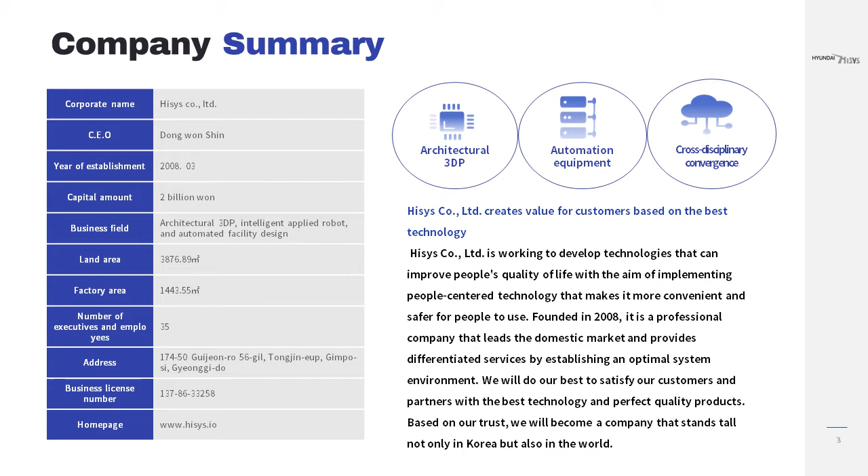Slides 3 to 6 show our company history. You may wish to read through these later; due to limited time, I will skip these slides. Our major shareholder is Hyundai BSNC, an affiliate company established by a member of the Hyundai Group.

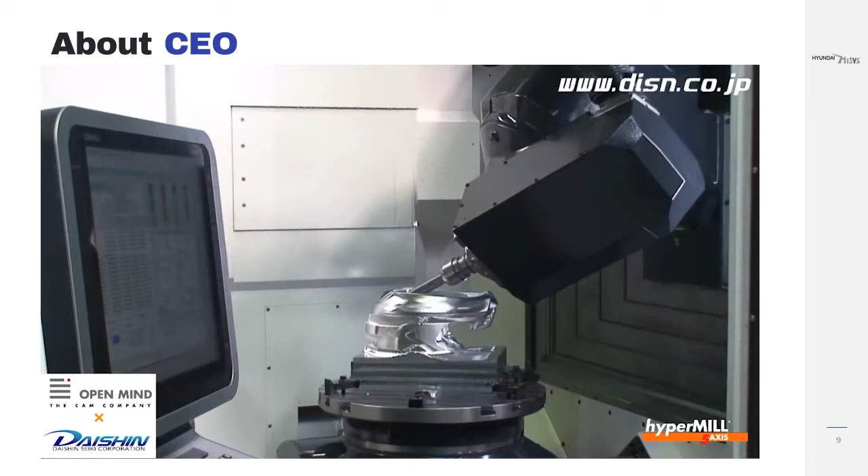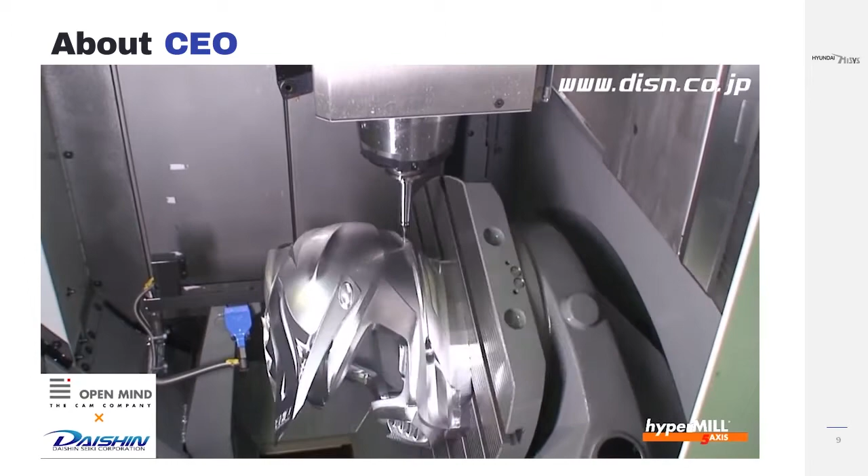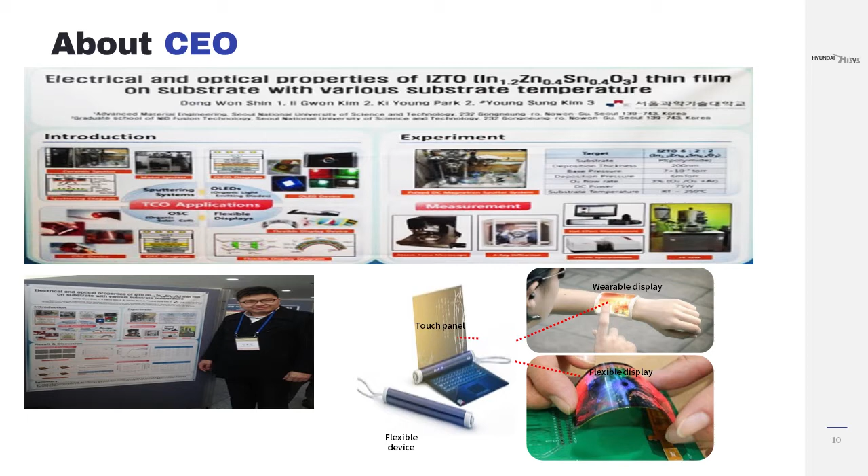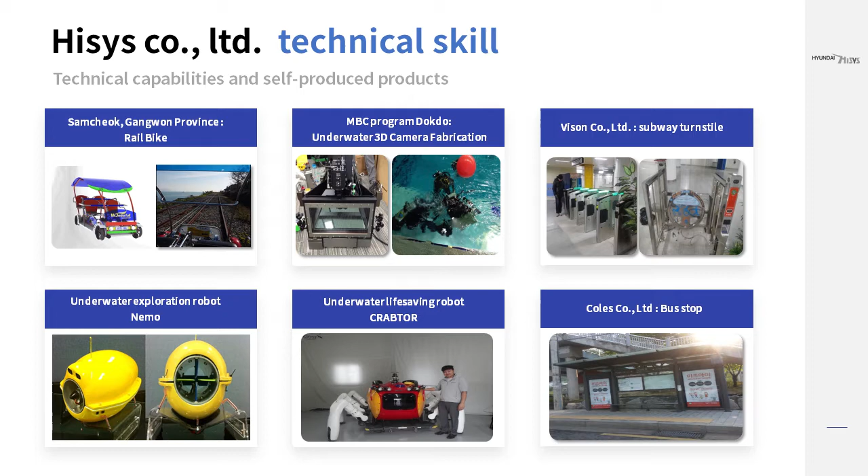As the CEO of HISYS, I have a breadth of experience and knowledge in engineering, having invented many innovative products including flexible touch panels and wearable displays for Samsung and LG. I have also developed automation production lines, electrical vehicles, prototype robots, underwater robots, subwater devices, and automated transportation systems. Additionally, I have supported artists with the development of their sculptures and animation figures.

Let me introduce you to our 5 core businesses: 3D civil engineering and construction projects, drone taxi development, hydrogen fuel development, waste plastic recycling, and aquaponics for the aquaculture industry.

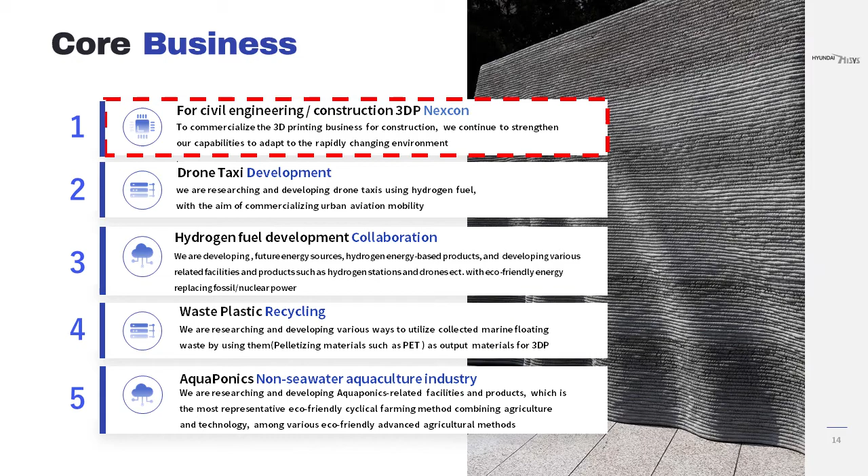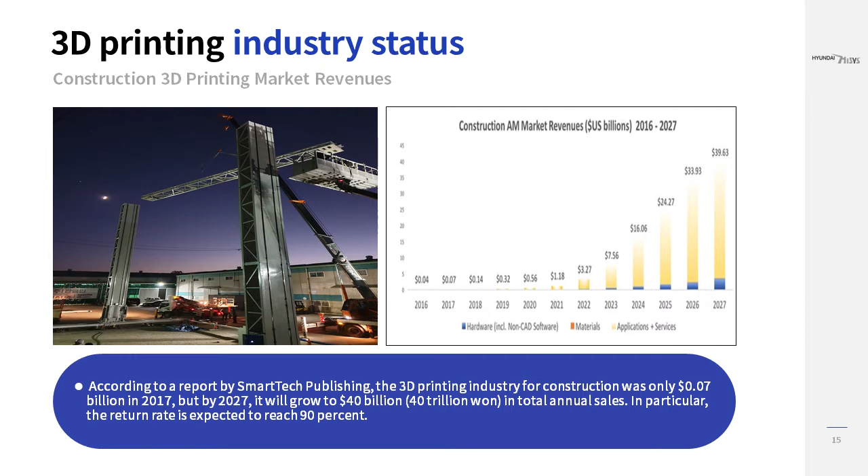According to reports by SmartTech Publishing, the 3D construction industry will grow to about $40 billion in total annual sales in the future. There are 5 advantages to using 3D printing construction technology: customized designing, reduction of material use, time efficiency, reduced labor, and waste reduction.

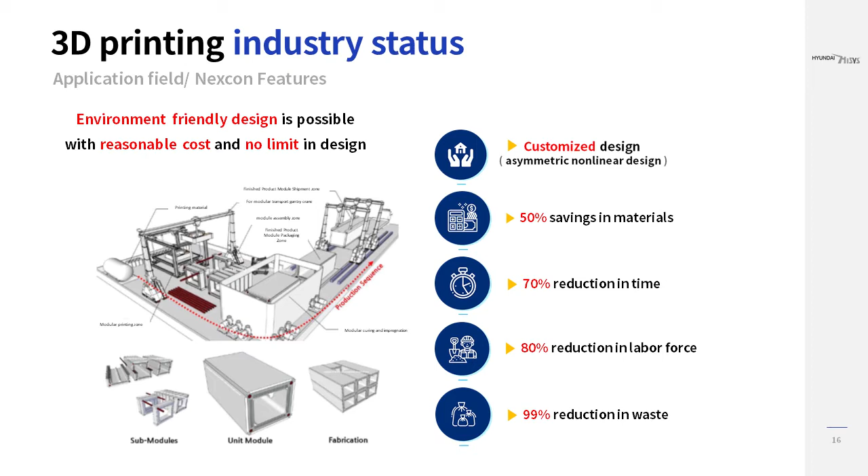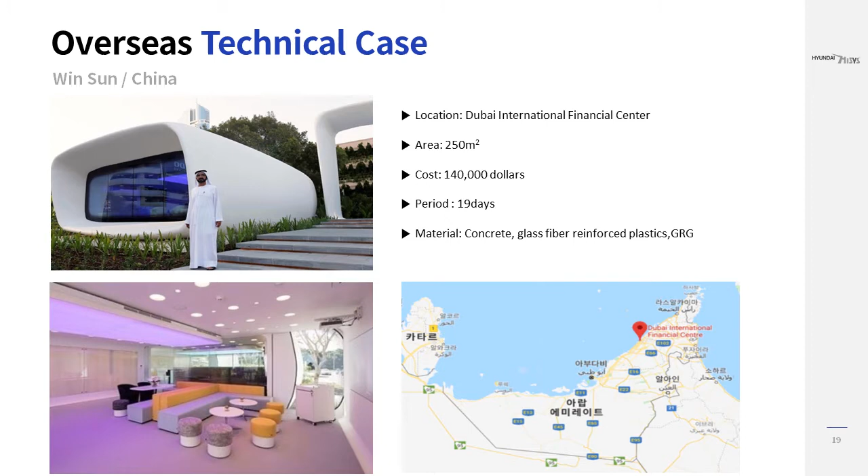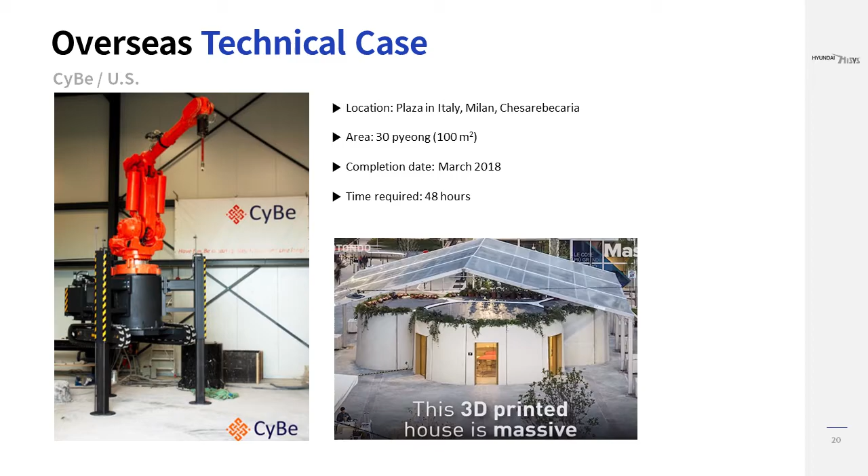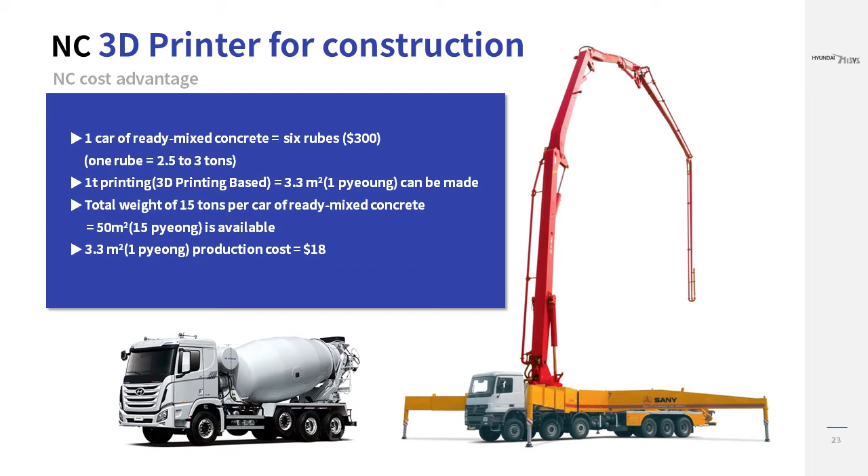To build a 3.3 square meter area using concrete, the material cost will be only $18 through 3D printing. Inevitably, the cost efficiency will be higher.

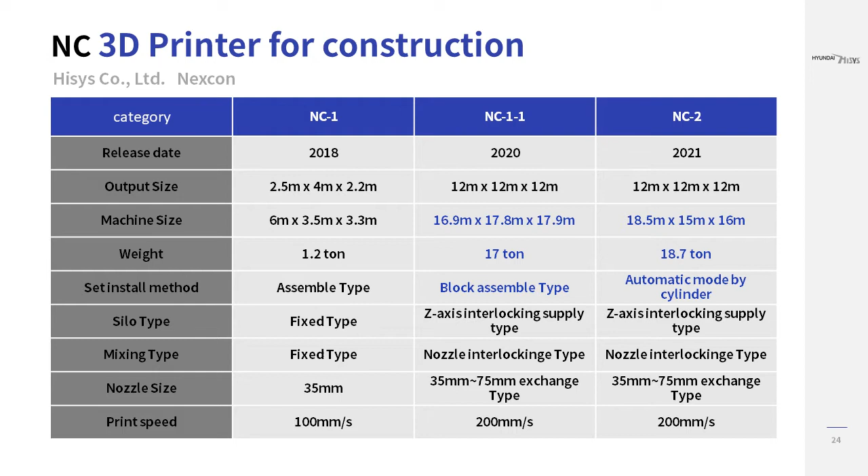This slide shows the development of our NC 3D printers. Our first prototype was built in 2018. We have currently developed version NC 1-1 and will reveal our latest model in 2021.

Our NC 3D printers are developed as gantry type models for easy movement, efficient assembly and dismantling, and enhanced accuracy. It is made to endure outdoor operations.

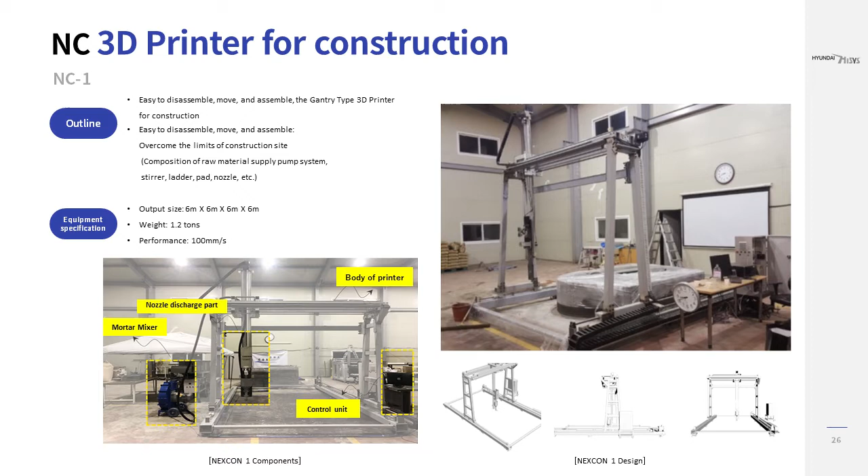NC1 was built in 2018 and is the first prototype of our 3D printers. The photo shows the main body of the gantry type model, including the nozzle, discharge unit, mortar mixer, and control unit. The gantry model allows for efficient assembly and dismantling, and enhanced accuracy. It is made to endure outdoor operations.

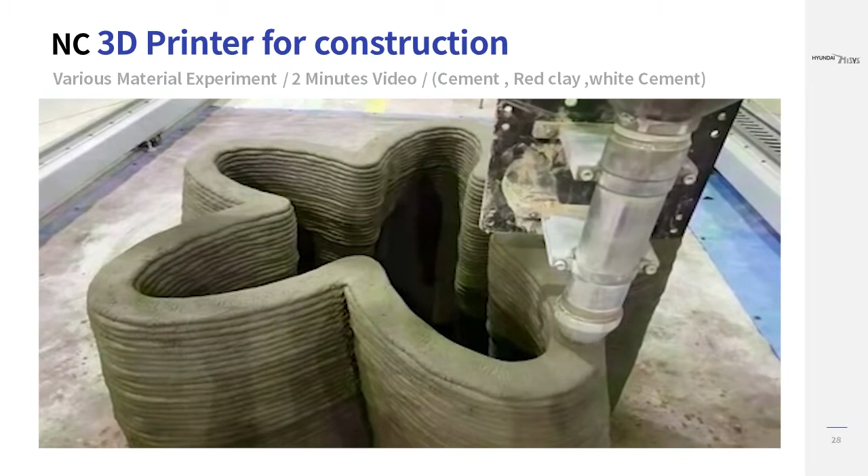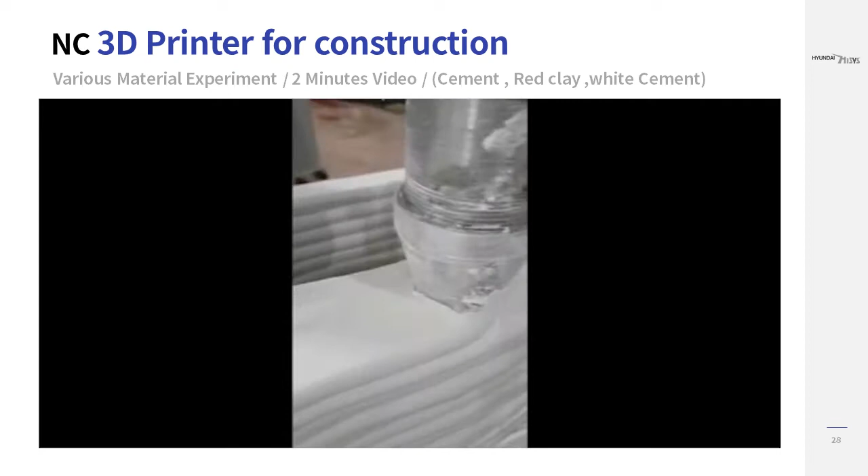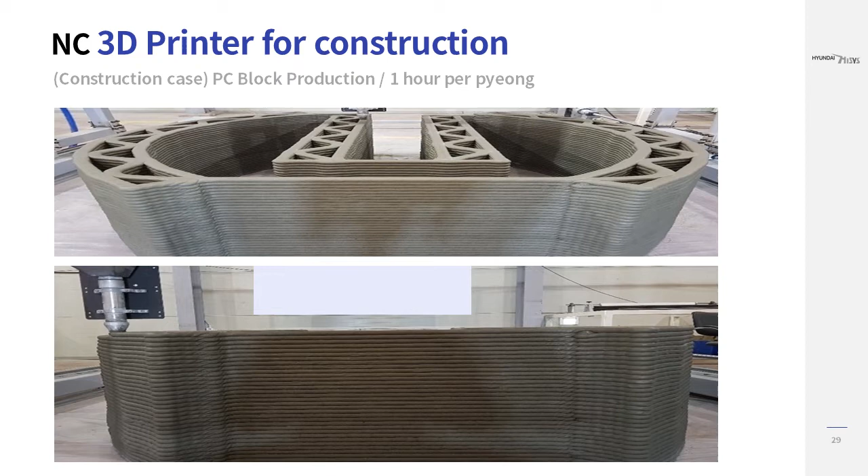The escalation of a precast block takes about 1 hour per pyeong, which is 3.3 square meters. The precast concrete is produced as blocks into which anchors are embedded for easy transportation.

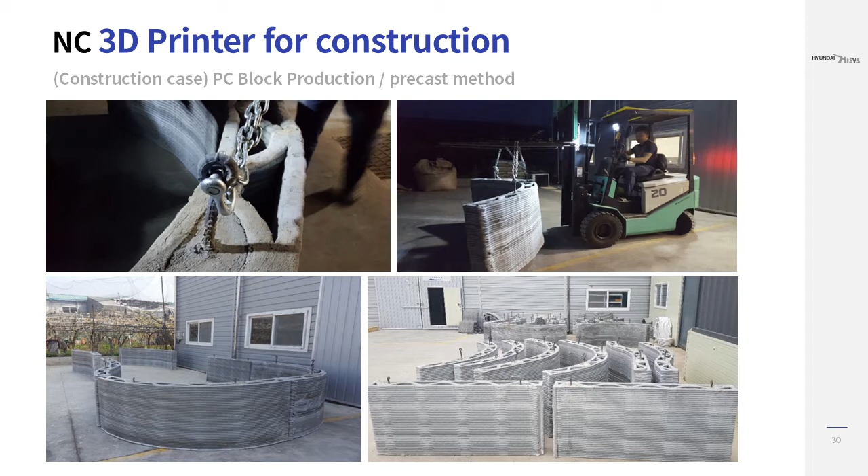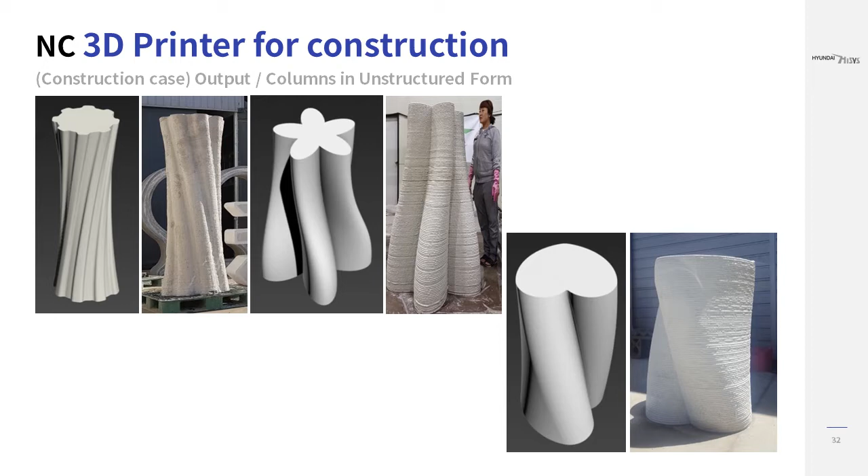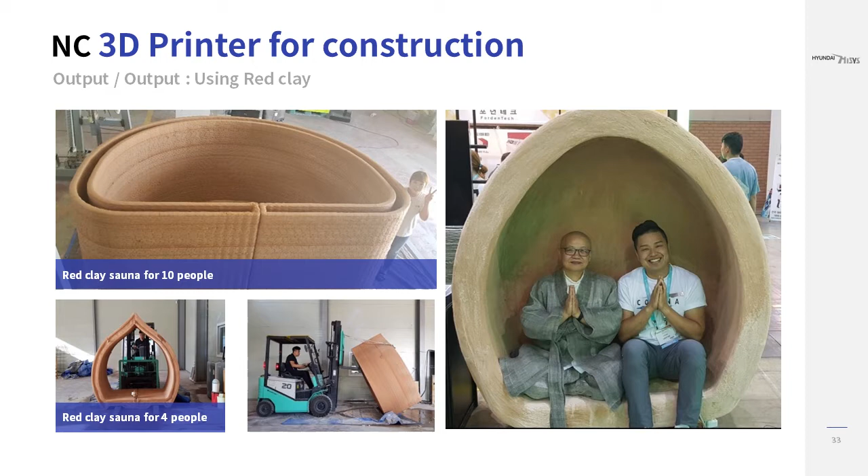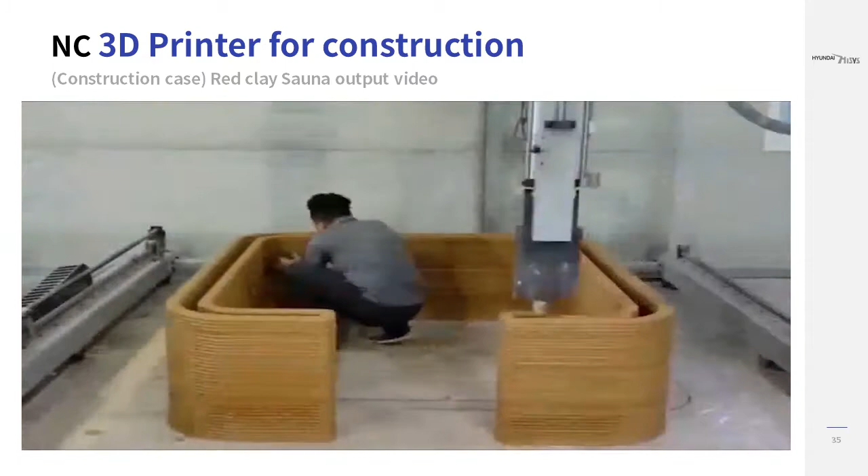3D printing construction will be instrumental in the future for humanitarian projects. The layered wall of a typical movable homeless shelter for 5 people can be escalated within 4 hours.

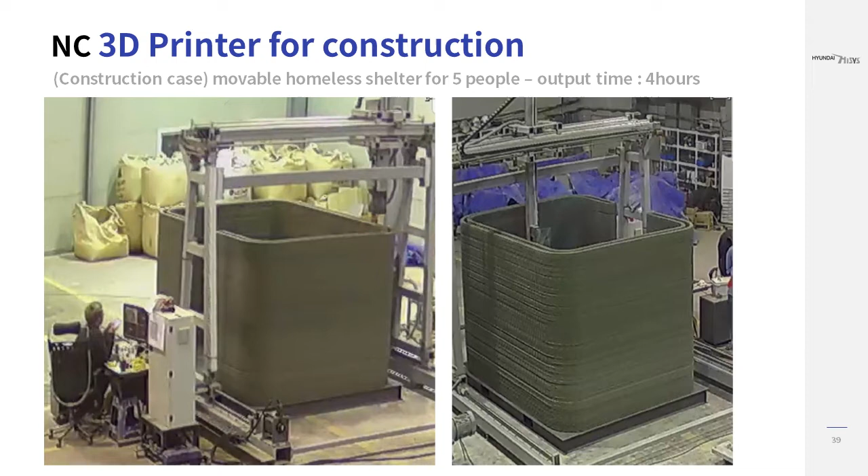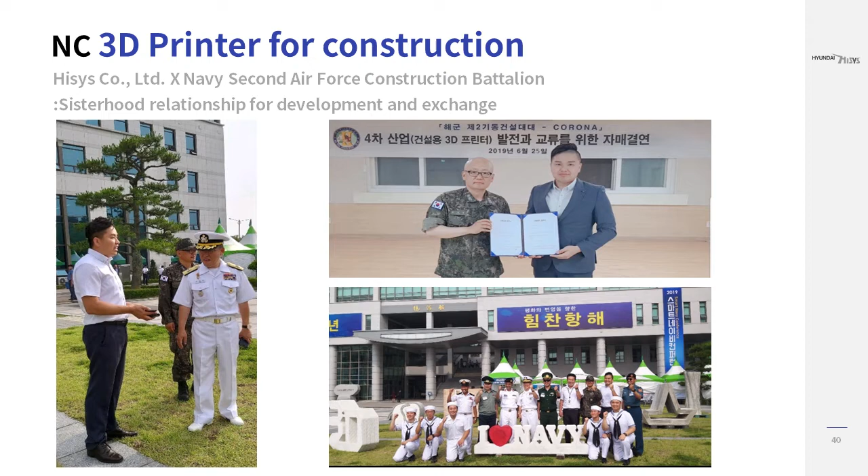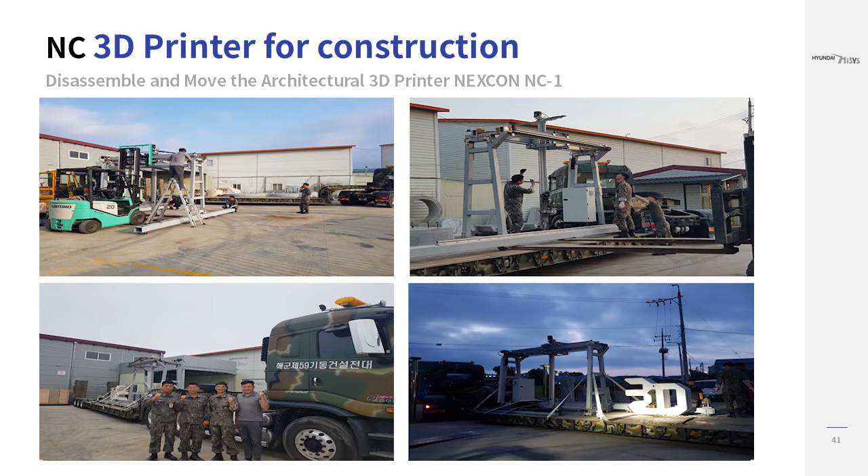HISYS has been designated as a development and exchange partner with the Korean Navy 2nd Air Force Construction Battalion for future developments. Our NC1 model has been transported onto the military site to produce various supporting facilities. As you can see, we have produced military bunkers and protection facilities in barracks.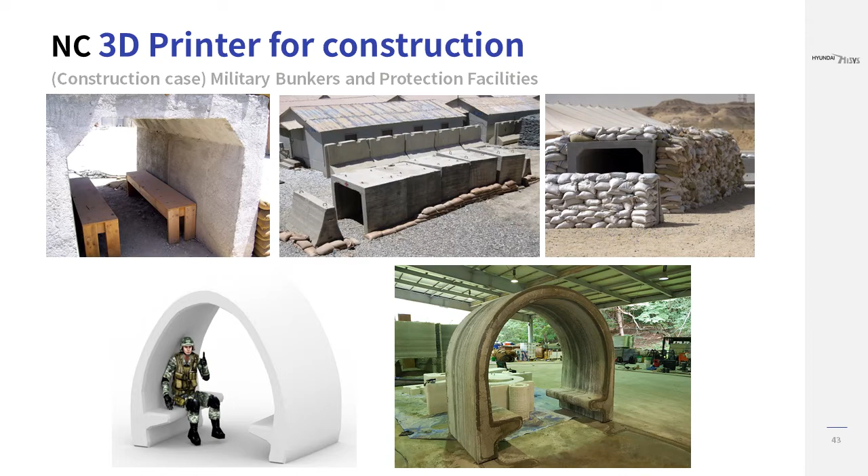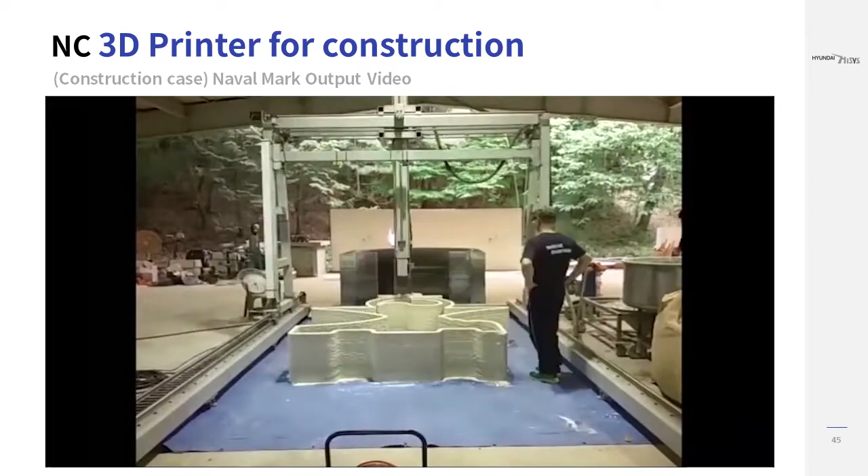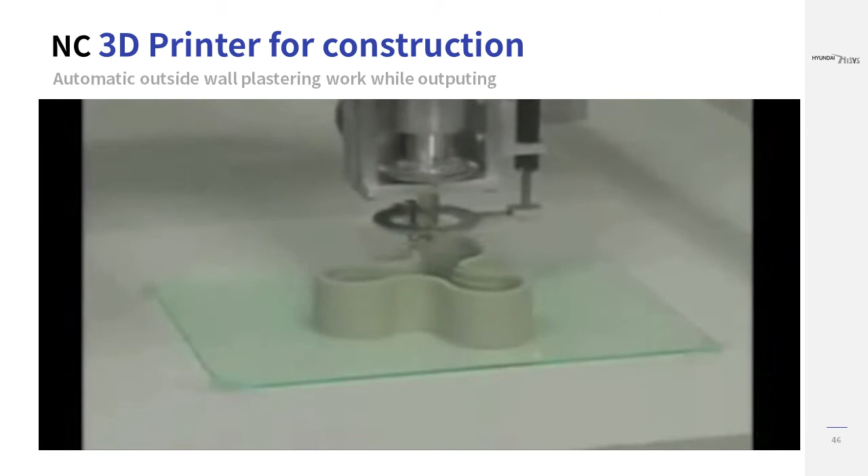Architectural work is not just limited to buildings. Keel block guard posts and barriers on battalion ships can also be produced using our NC1 models.

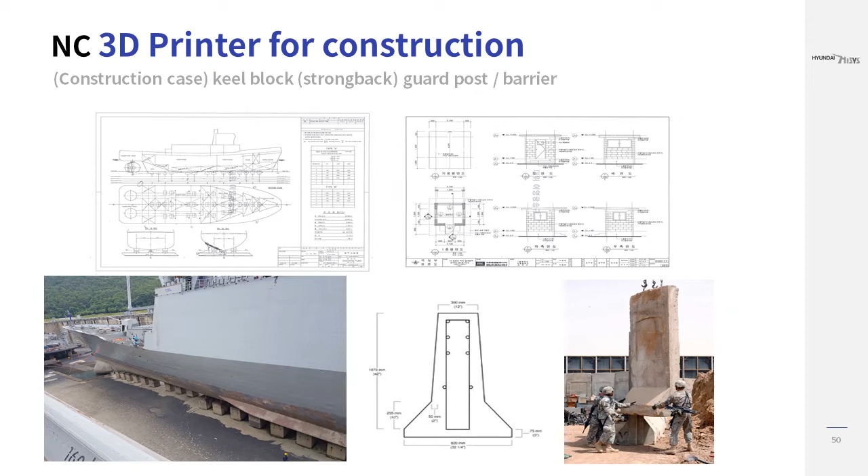To symbolize partnership with Hyundai BS&C, our first mini project was to build a security office.

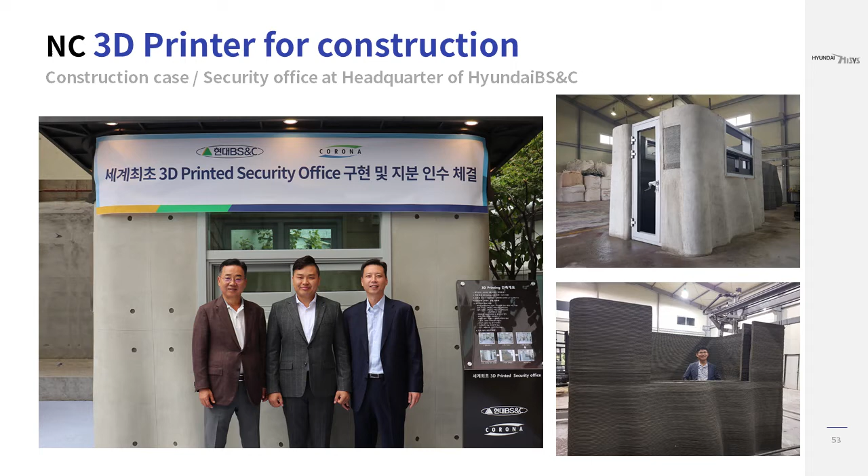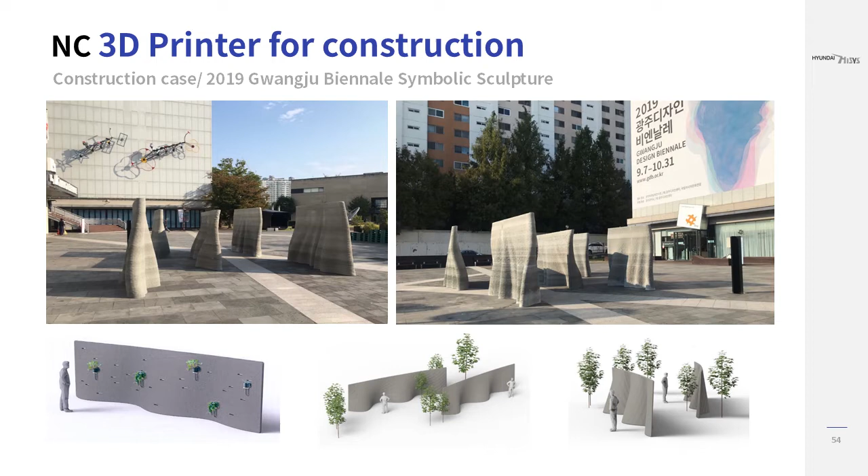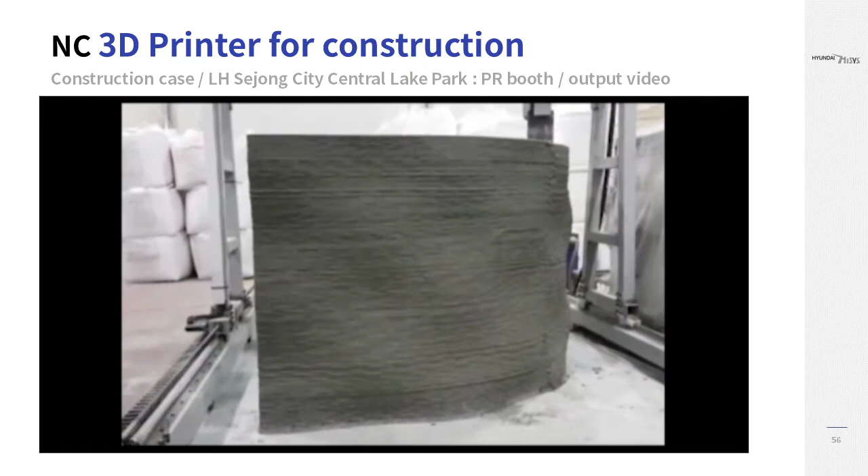The NC1-1 is our latest model, produced this year. The improved composition of the raw material supply pump system, stirrer, ladder, pad, nozzle, and other parts has meant that we now have the ability to work more flexibly on construction sites.

When assembling and dismantling the printer, despite its increase in size, inevitably the output size is also bigger by almost double.

Precast blocks can now be escalated as large as 12 meters in width by 12 meters in length by 12 meters in height.

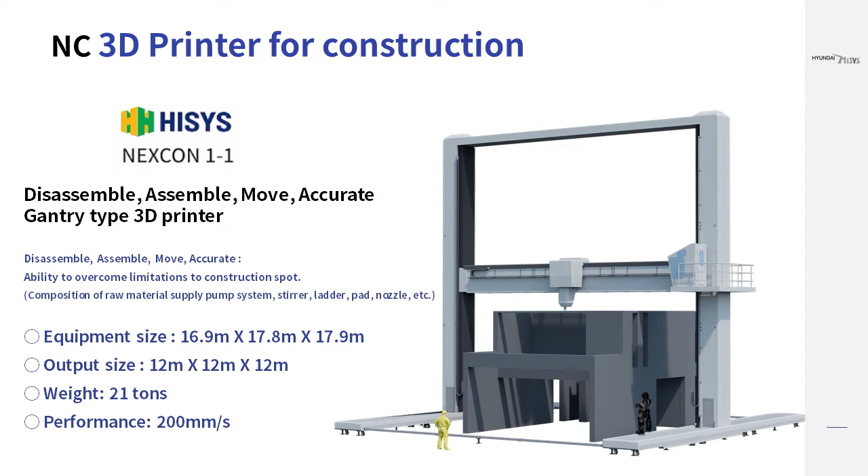Almost 10 domestic and foreign technology patents have been verified for the core technologies of our 3D construction printers. Additionally, about 20 more patent applications are currently in progress.

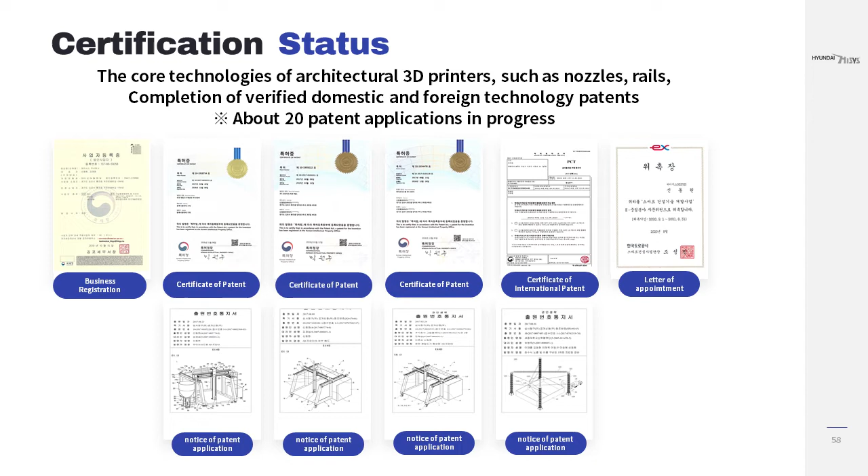Our NC1-1 is currently being reviewed for the Guinness Book of World Records as the biggest innovative 3D printer for architecture.

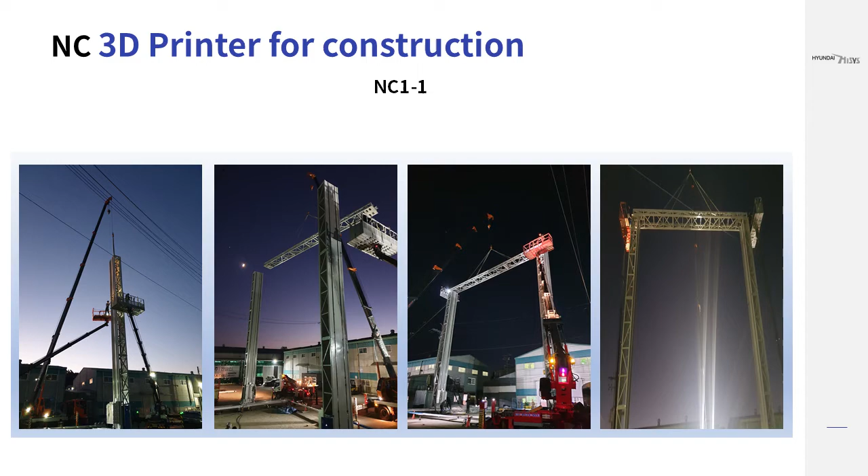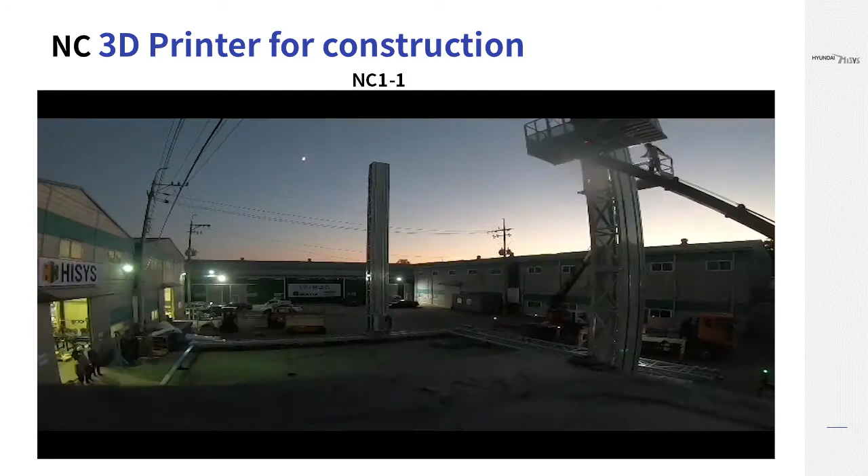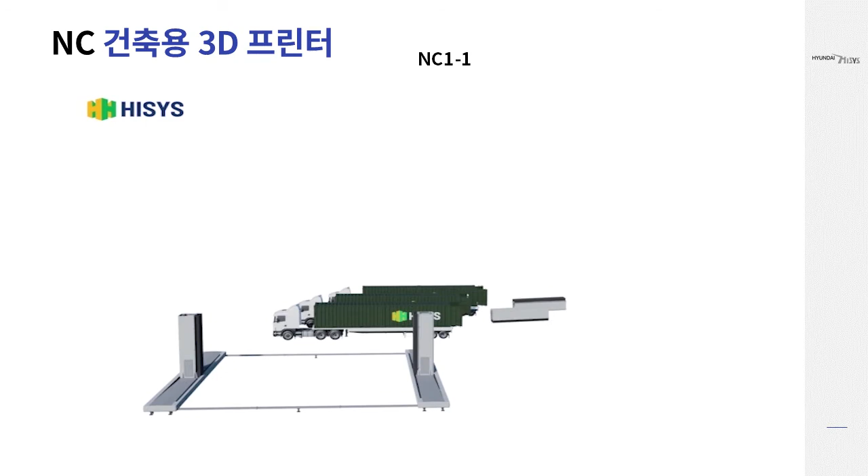This slide shows the assembly of the NC1-1. The following video shows the assembly and dismantling process in greater detail.

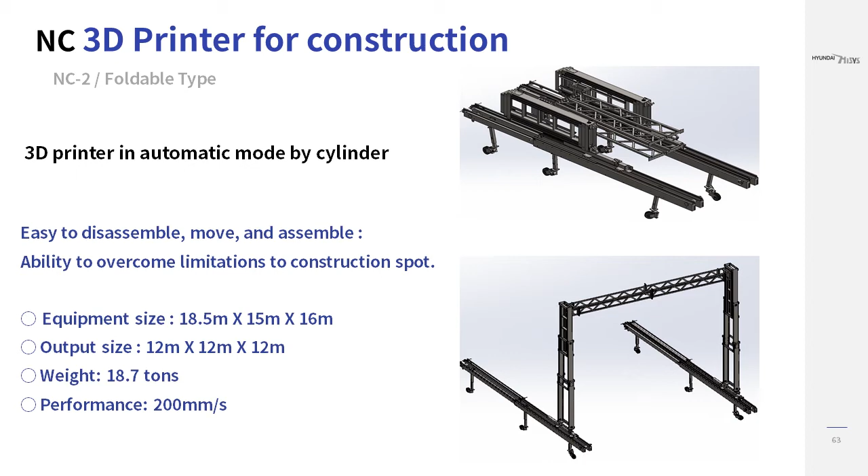Our NC2 printer model will be revealed next year. The biggest advantage of the NC2 is that it is slightly lighter in weight and is foldable. This will greatly simplify the assembling and dismantling process, as well as the transportation process.

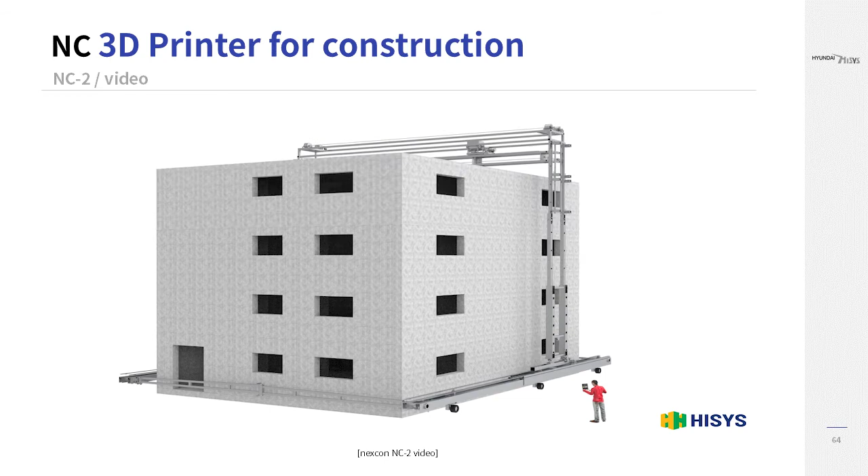Again, improvement of the installation process is one of the key focuses of our development for better flexibility of use on construction sites.

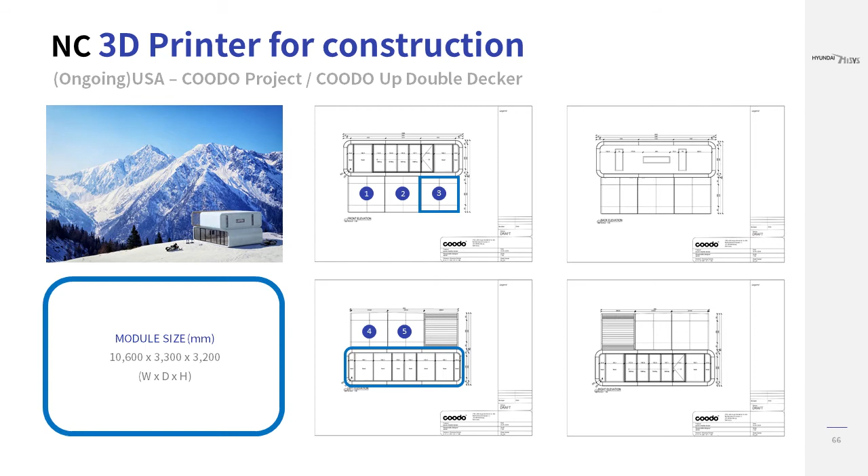We have embarked on an agreement with COODO, a reputable German company that approached us for the development of 3D precast shells for their living units.

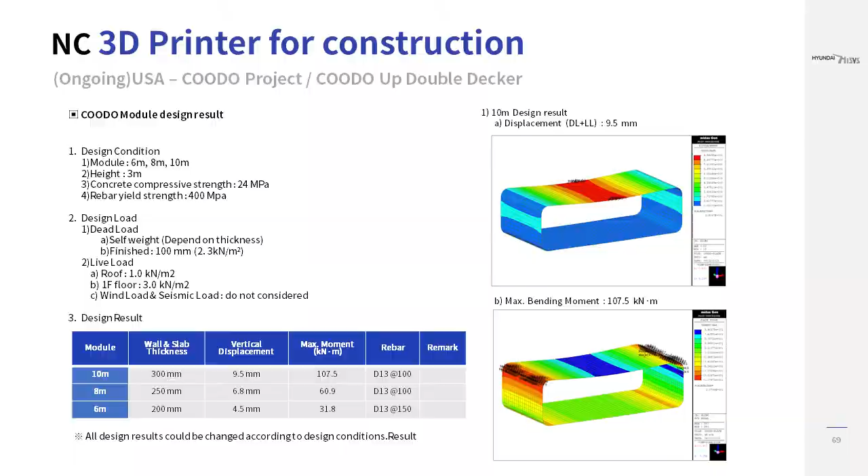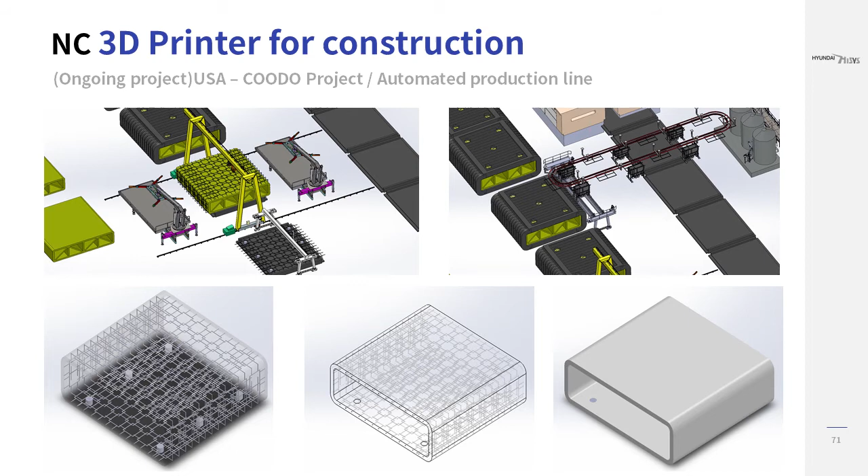As you can see, some units are double-deckers, others are single stories. Our plan is to establish an automated production line to produce these shells for COODO.

We have been commissioned by Korea Land and Housing Corporation, a government subsidized company, to build public toilets in a public park in Hanam City. These will be completed at the end of 2020.

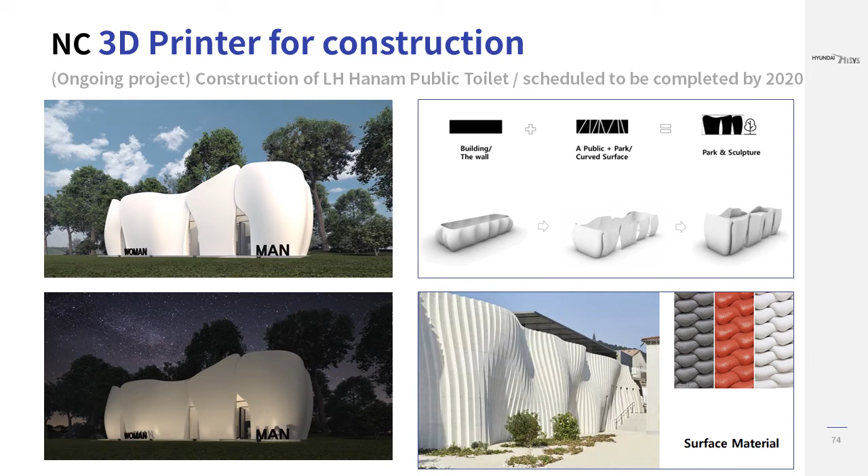As you can see through the slides, there are many more projects ongoing. This particular project is again on Korea Land and Housing Corporation commission for the Sejong Smart Forest Town in Korea,

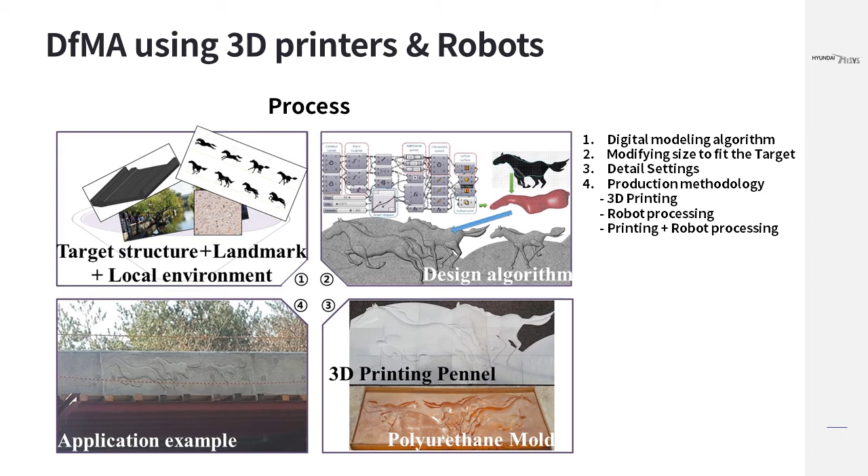including an aquaponic aquarium. One of our most exciting projects is to support the DfMA project using 3D printers and robots. The inventive technology and application for this project allows for the designing of complex motifs on bridge columns and

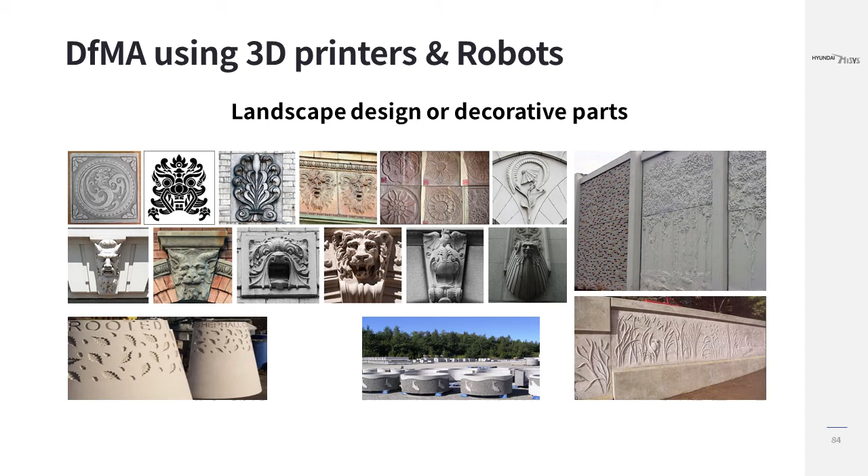other civil engineering structures. We can reinvent classical relic designs that can be used for restoration and preservation of prehistoric architecture in future. The preferred printer for this project is the robotic construction printer, not the gantry type, as the

accent is on details and not on the magnitude of project size.

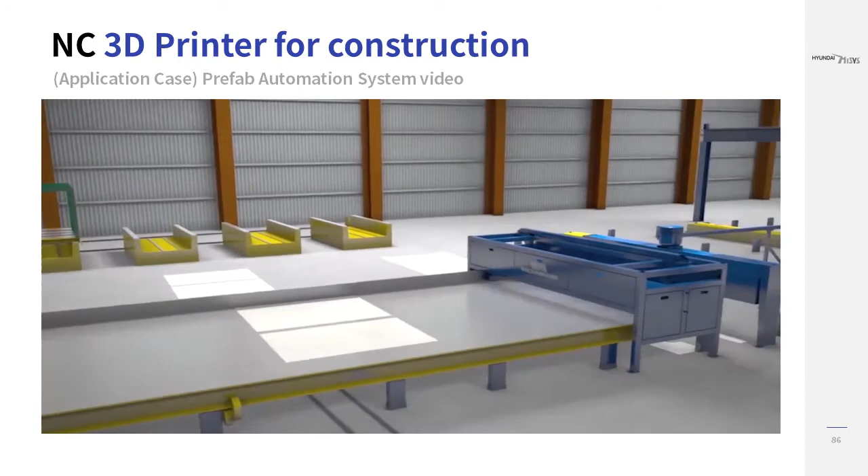Another high-profile project is with Daewoo for the production of a prefab automation system to make prefabricated concrete slabs for bridge girders. There are 7 phases to the prefab plant core process facility.

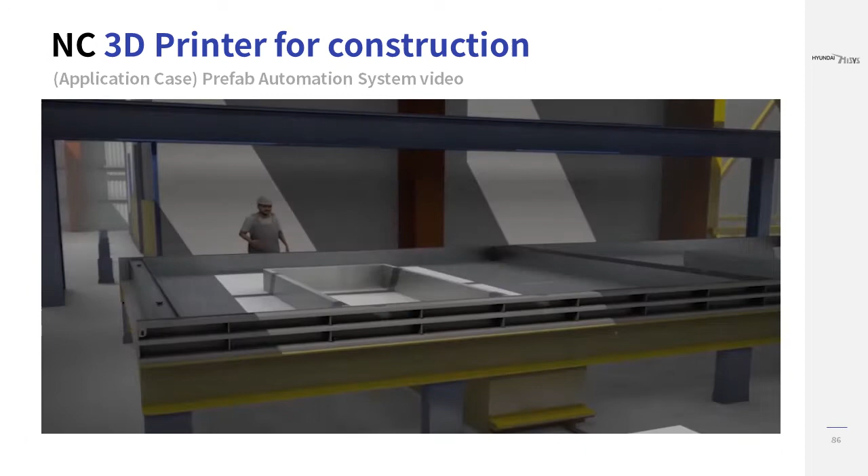The batch plant stores, mixes, and transports the concrete mix. The mold base shapes the concrete slabs and also accommodates the rebar placement.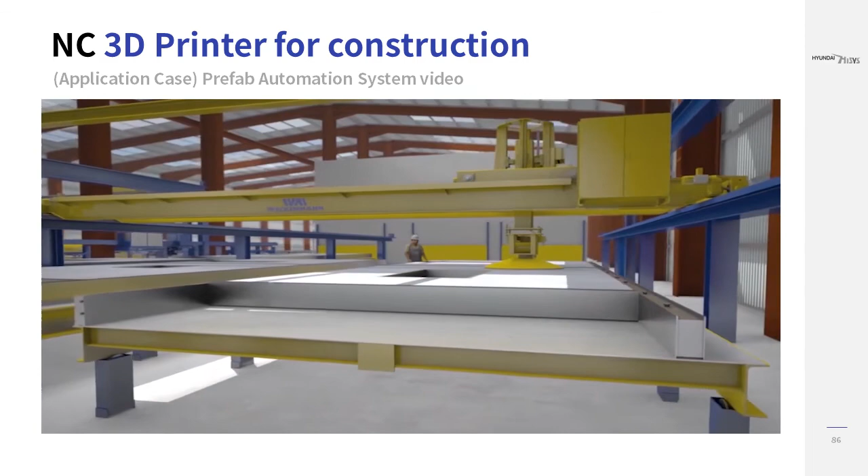The concrete distributor is self-explanatory in that it helps to pour buckets of concrete into the mold. The surface finishing machine comprises abrasive equipment for smoothing and flattening the surface of the molded slabs of concrete.

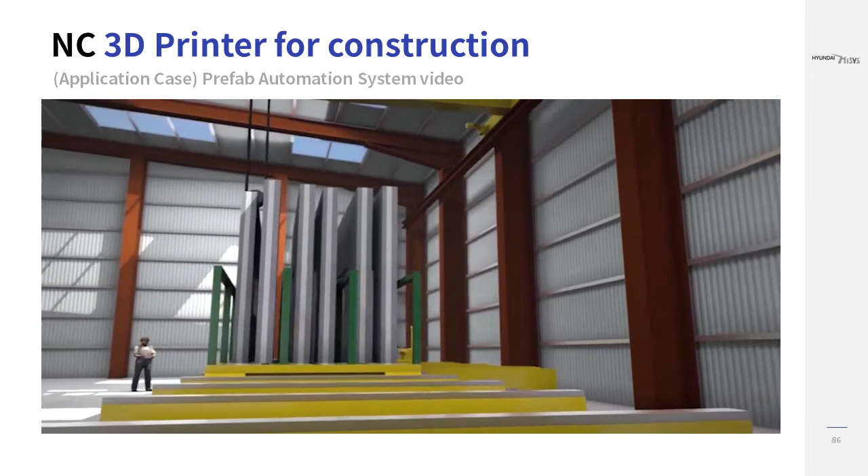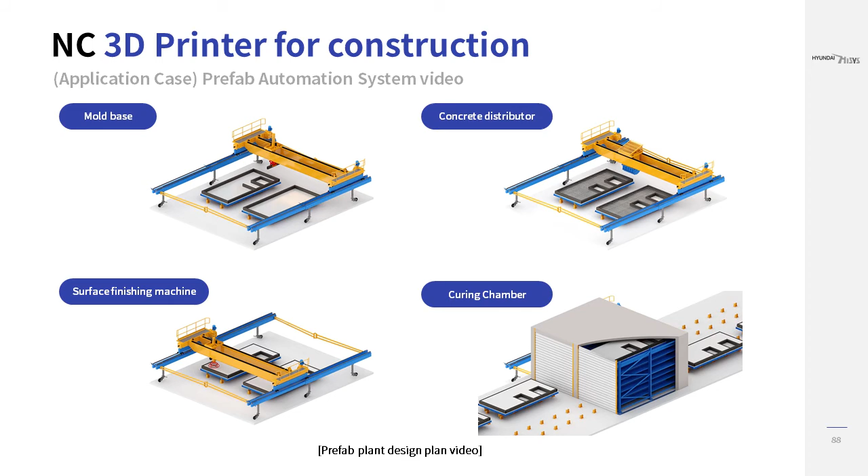Future development of our NC 3D printers is to advance from the gantry type 3D printer to the robotic prototypes. We anticipate the production of a combined multi-joint robotic arm and gantry type method printer next year, subsequently progressing into the development of the infinite orbital type robotic arm mobile equipment, which will greatly increase mobility and flexibility.

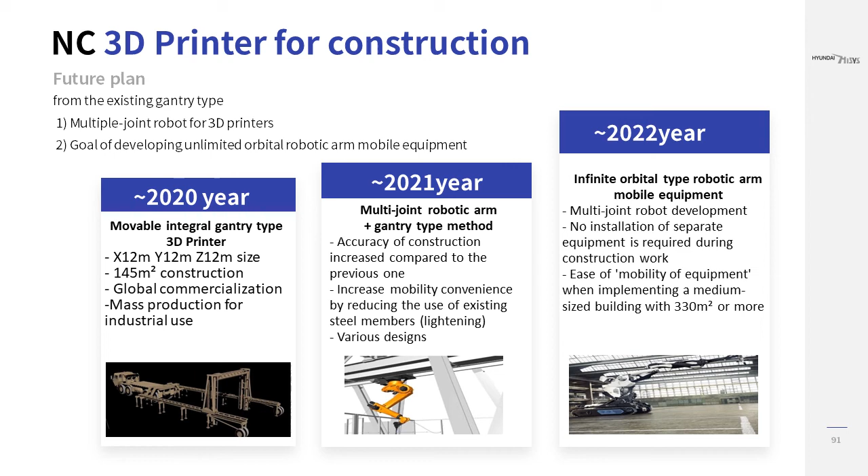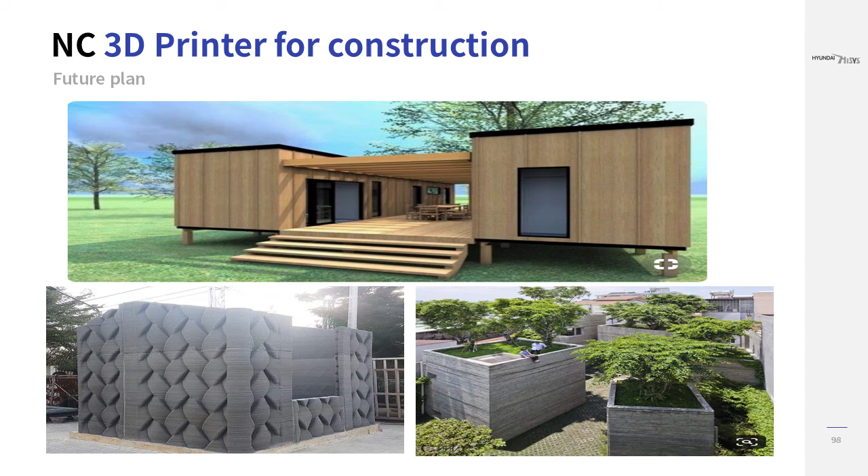Our target in future is to progress from the low aesthetic and functional building markets with limited time and budget to much more sophisticated designs and structures using 3D printing, not merely as a means for cheaper alternatives, but to incorporate its true strengths into the evolution of an unforeseen classification of architectural developments.

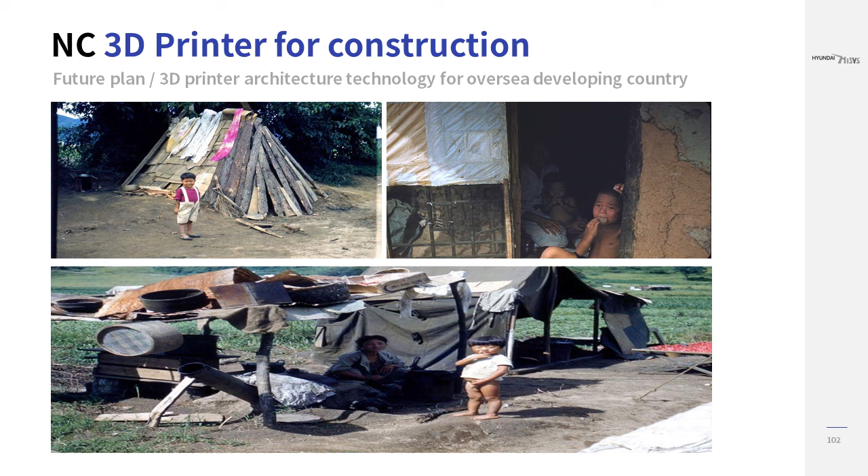As Bill Gates once said, humanity's greatest advances are not in its discoveries, but in how those discoveries are applied to reduce inequity, whether through democracy, strong public education, quality health care, or broad economic opportunity. Reducing inequity is the highest human achievement.

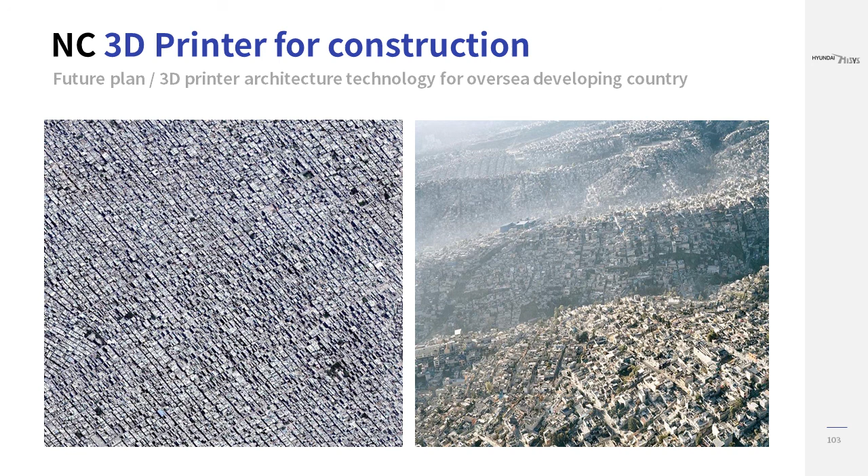I believe that the role of our 3D construction printers in future humanitarian projects will resonate the ethos of the greatest corporates in the world. Thank you.